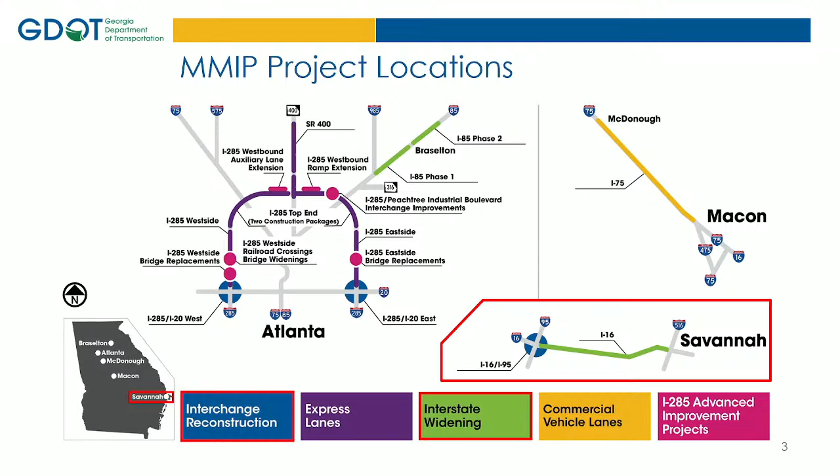So the I-16/I-95 improvement project, looking at this particular diagram here, gives us an idea of where this project is at the interchange, with some directional arrows. It also gives you some project facts associated with the fact that this is a design build project. It's separate from the normal project delivery that GDOT has.

One interesting fact: we're not doing any type of coordination directly with the district. District 5 in Jesup has nothing to do with the oversight of this project. This project is exclusively being handled by our Atlanta Office of Innovative Delivery out of our P3 division. Project length is 7.1 miles, and project length along I-95 is 2.4 miles.

So the widening itself between I-516 and I-95 along I-16 is somewhere in that 7.1 miles. It's probably a little less than that since we're on both sides, to the west of I-95 and to the east of I-516. Additional lane miles being added: 19 miles.

New or rehab bridges: we've got 13 bridges, and John will discuss those bridges as far as breakdowns—the ones that are new bridges, the ones that are being replaced, and what the rehab work is along some of those bridges as well.

Project cost is a little over $260 million. Design notice to proceed was October of 2018, with our substantial completion date looking at Q3 of 2022.

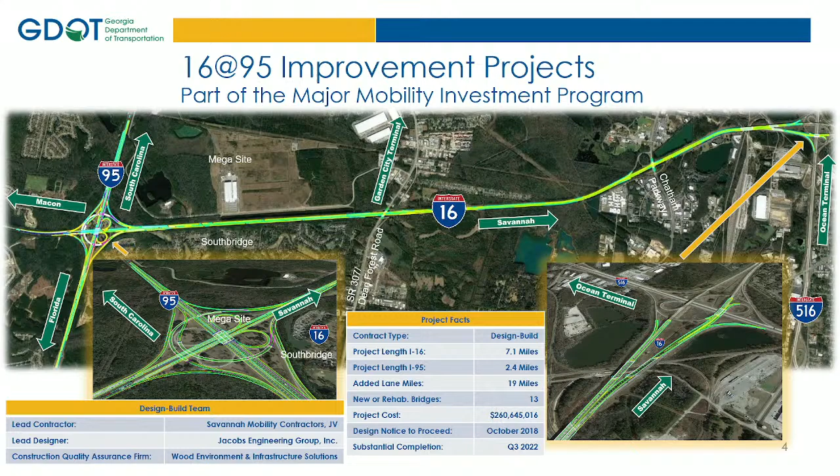The actual lead contractor that we have contracted with is SMC, Savannah Mobility Contractors, with their lead designer being Jacobs Engineering Group, and the quality assurance firm is Wood. It's just interesting to note that this is not a typical delivery model that GDOT has each and every day—it is a design build.

A few of the benefits for the I-16/I-95 improvement, looking at the different areas where we're trying to make improvements: the project includes reconstruction of the actual interchange that we discussed, increased safety and operational efficiency for passenger and heavy freight vehicles. The I-16 widening will modify the existing median-divided 4-lane corridor along I-16 between I-95 and I-516.

Some of the interesting parts of this project also include building a 2-lane emergency use median crossover along I-16 that'll be placed in the median between Dean Forest Road and I-95. And then we'll have a collector distributor lane along I-95 for the northbound traffic that is moving along the loop ramps, which will remain in place to the east.

The existing loop ramps to the west of the interchange are being done away with as part of the partial turbine design.

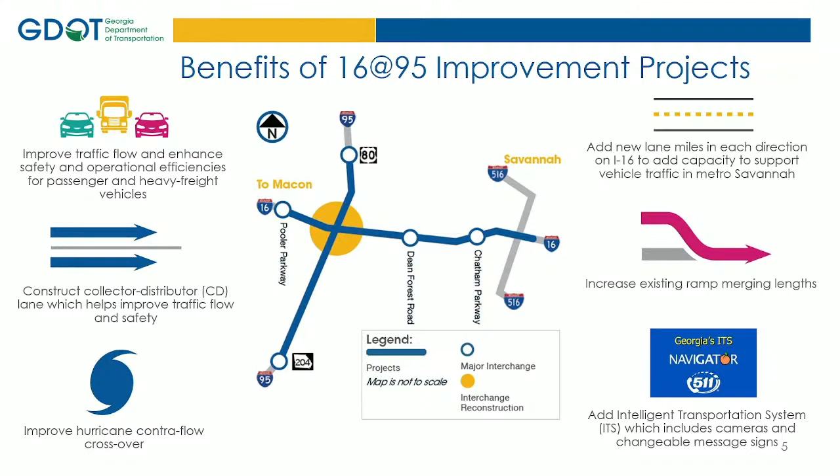So as far as some of the deeper dive into the actual project, I'd like to ask John Martell if he'd come up and we'll do our tag-off. I'll be Stone Cold Steve Austin, and you can be the Undertaker, whatever.

All right, thanks Ron. Good afternoon, everybody. It's great to see you all. Hope you didn't have too many cookies to make you fall asleep now. But I'm going to go over some more technical aspects, show you some really cool pictures, kind of give you a visualization of what we're doing now and what it's going to look like when we're done.

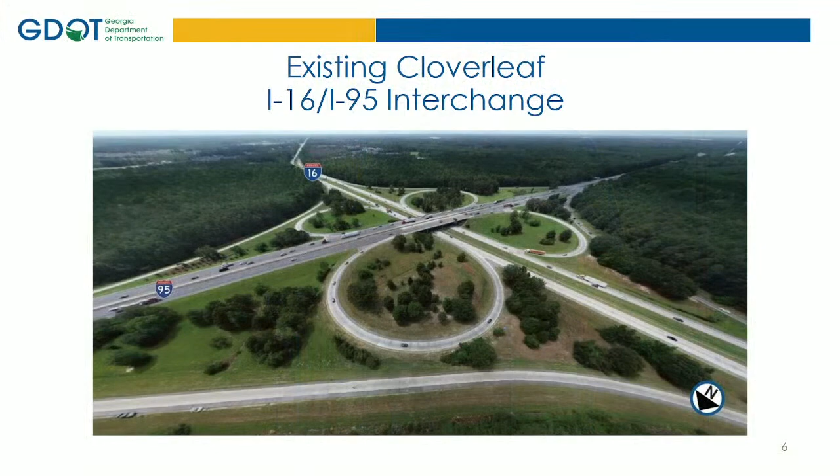So this is the original I-16/I-95 interchange, built in the 1967 to '71 timeframe. As you all know, it's woefully under capacity at this time. That's what brought us today to our project.

This project is the very first in the state of Georgia to have a partial turbine interchange system. It's pretty unique because of the rotary design layout. We're actually building these bridges now.

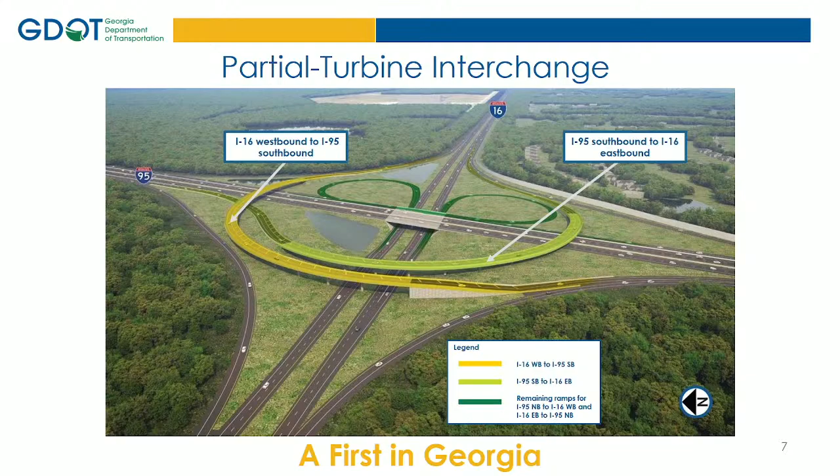The light yellow represents I-16 westbound to I-95 southbound, and the green represents the movement of I-95 southbound to I-16 eastbound. These are really heavy traffic and truck volumes through here because of the Port of Savannah, an unbelievable amount of traffic on the intercoastal with the I-95 corridor.

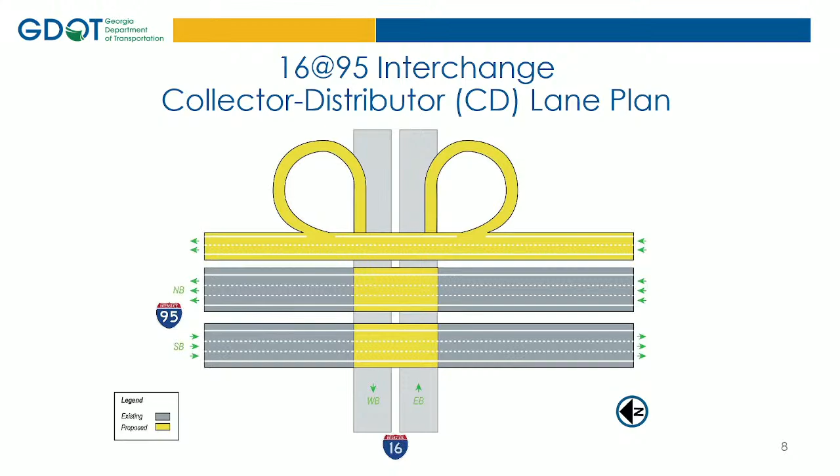The problem now is that with this cloverleaf interchange, we sometimes have accidents up on top of the bridge deck because of that really short weave at the top. So one way to fix that is we're going to put in the CD lane that Ron touched on. It's going to take away all those conflict movements, the delays, the slowing down and speeding up to try to merge into traffic, getting that off the general purpose lanes. I think this is going to help tremendously.

We always talk about the interchange at I-95, but what people don't realize is that we're really doing some major improvements into the city of Savannah from the I-95 corridor. We're going to widen I-16 to 6 lanes in the median of I-16. This work is currently underway.

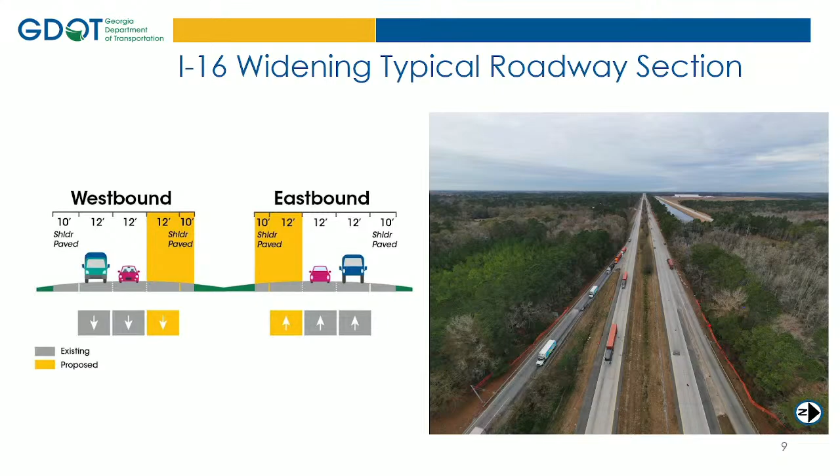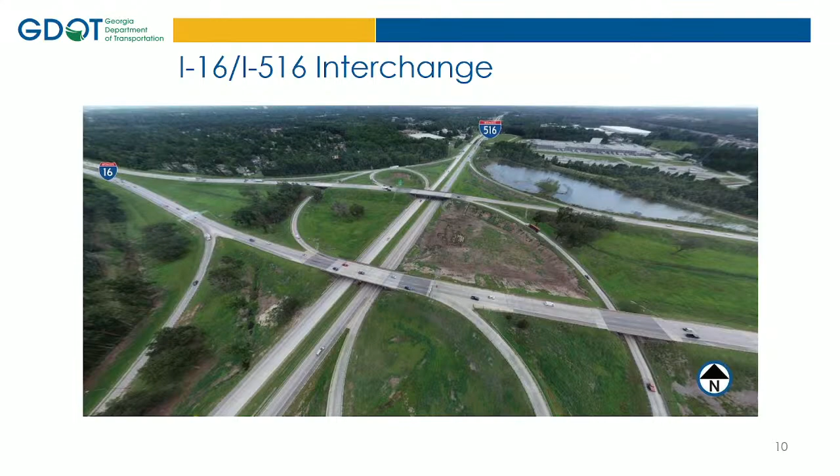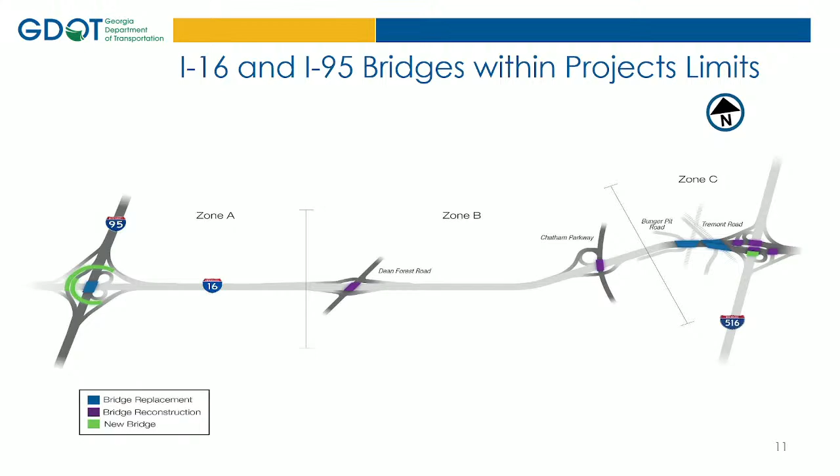We've broken the project into 3 zones. Zone A goes from about Dean Forest Road to the west. Zone B is between Dean Forest and Chatham Parkway. And Zone C is what we're referring to mostly as the I-16, 516 interchange area.

In Zone A, we have 2 brand new bridges, the turbine bridges, handling the movements I just described. The third bridge is an existing bridge, but we're reconstructing it in its entirety, making it wider and somewhat longer. That's the CD bridge, and we're also replacing the GP lanes on top of where I-95 goes over I-16.

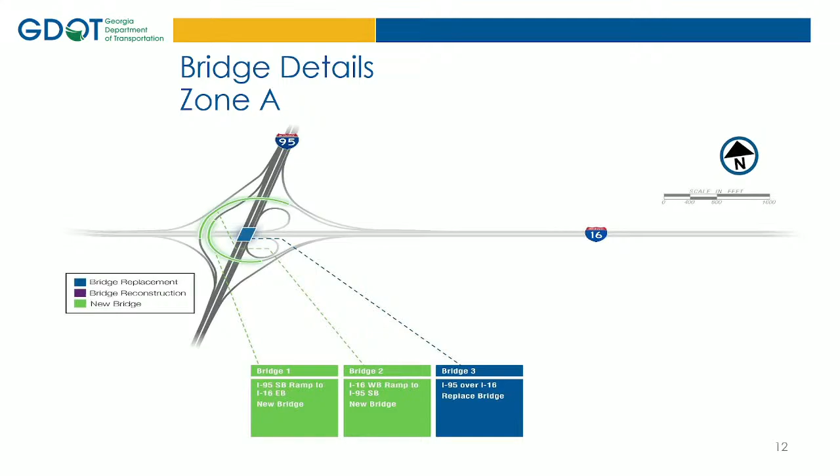As that continues, we also have a lot of substructure work in progress on Bridge 1 and Bridge 2. These are typically 2-column bents. We have 5 piles for each column or bent, as we call them. Those are 24-inch by 24-inch pre-stressed concrete piles, ranging anywhere from about 60 up to 85 feet in length.

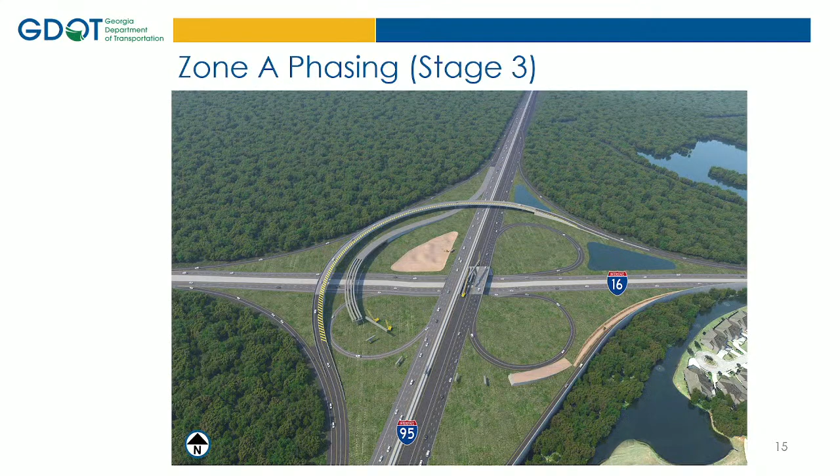As we continue and progress, you can see how the project's going to come to fruition. This is a final concept of what the project will look like in the end.

Going into Zone B, we have Dean Forest, which, after our contract was awarded, the department let another contract within our contract. That's created some challenges for us, but it's going really well so far. Really, lessons learned, emphasis on communication, getting these contractors to communicate with one another. Ron's actually managing this project.

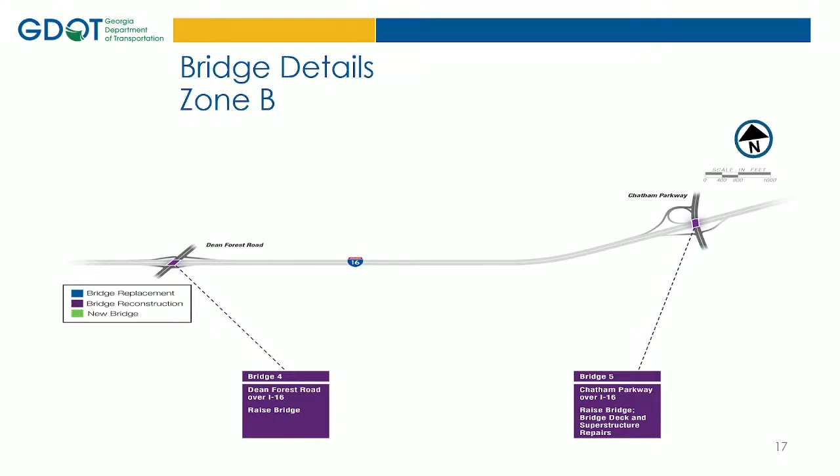We're also going to raise Chatham Parkway, which has a substandard clearance. It's been hit several times because it was built in the 70s. So we're going to elevate that by 6 to 8 inches in height.

The current Dean Forest project is going to be a new DDI, Diverging Diamond Interchange. It's being built by Reeves Construction, about a $34 million project. They are currently putting in soil nails and going to build half of that bridge beside the existing Dean Forest bridge. That's currently going on right now as we talk.

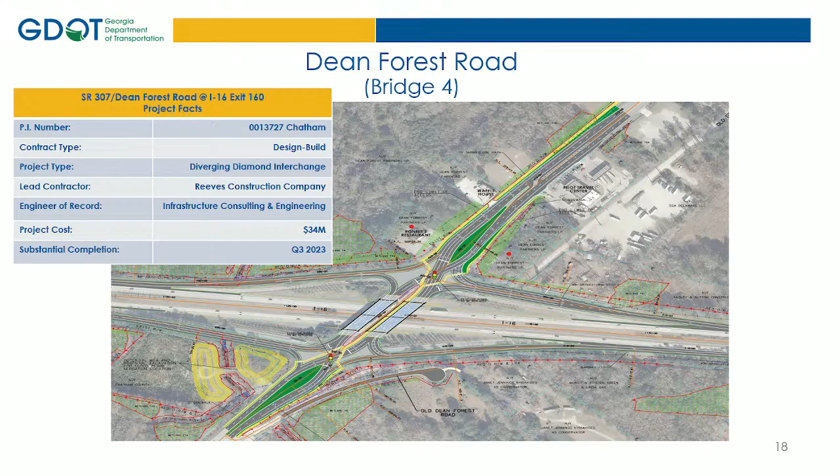As we go into Zone C, you can see we have quite a bit more bridge work going on at the far east end. We have Bridge 6, 7, and 8, which are really challenging structures, not from the complexity of the bridges, but because they're built over active CSX railroads. These railroad lines have, I've heard, up to 21 trains a day. So we have a full-time flagger on the job for this 18-month contract.

I don't know if that'll be enough, but we're hoping our plan is that it will be. The problem is that we have the main spans over the active tracks and cannot work anywhere near the tracks within certain reasonable amounts—can't work over the top of it or even adjacent to it when we have an active train going through or even parked on the tracks.

We're working really closely with CSX and STV, who's their structural consultant, and we have a really good working rapport with them. We have Scott Bridge, who's the subcontractor to SMC, our prime, and they have experience working with CSX. So we have some relationships there we're trying to leverage, and that's really helping with the communication and the planning.

They're really going to need a plan A and plan B every day because of homeland security issues. We really don't know what the time schedule is of the trains until the day before. So as you can imagine, it's pretty challenging.

We're working through it. Bridges 9, 10, 11, and 12 are repairs and refurbishing — redecking, redoing some of the joints, cleaning them up, bringing them up to code, making them modern. Bridge 13 is the only one that's really new, well, 6, 7, and 8 are brand new too, but 11 is an existing bridge that we're going to widen.

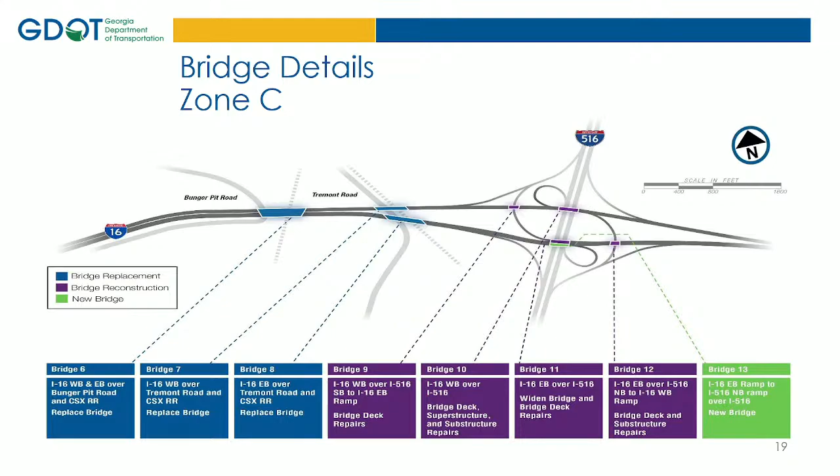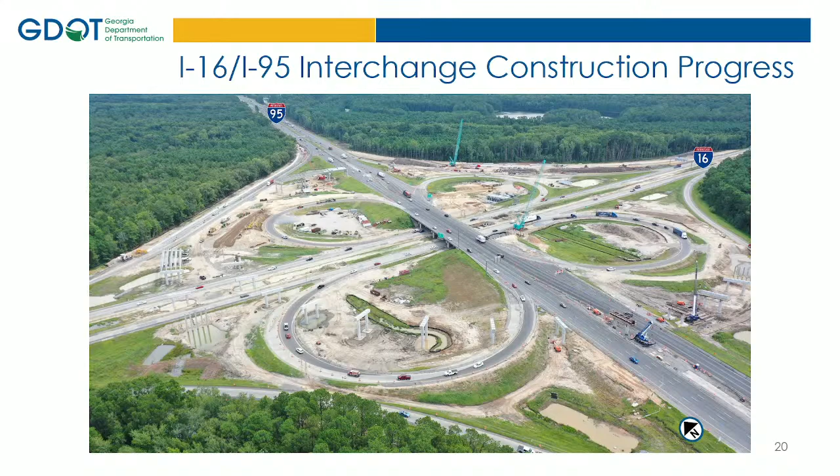Last night we had a really good productive night over the weekend. I think we had two spans set over I-16. We had shut down I-16 completely, which fortunately is really low volume at night. It's not like shutting down I-95, that'd be a whole other animal. But I-16 is very low volume after about 10 o'clock at night, so we're able to detour traffic without too much impact to the traveling public.

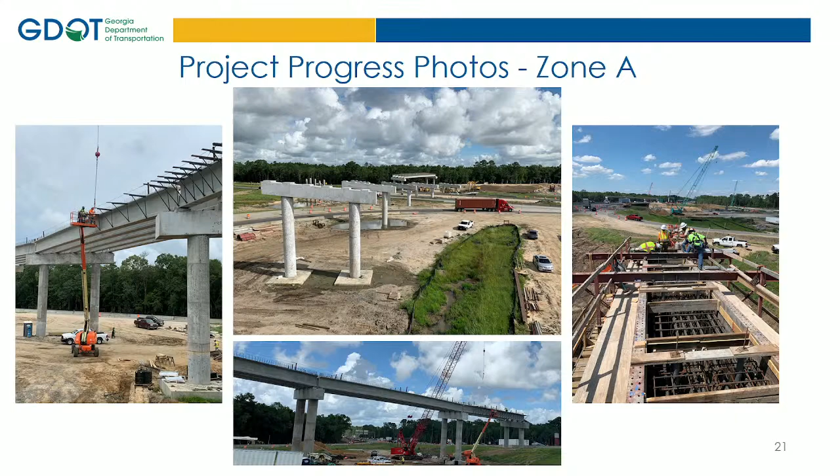Things are really ramping up right now. The contractor's doing a really good job. The only thing that's really hurting us right now is weather. We've had some weather impacts, but all in all they're doing really good. Once we get these beams set, put in the deck pans, get the overhangs in, we can start tying steel. The guys can be high and dry, as we say — they'll be able to work out of the mud and the rain, and I think our production will go way up.

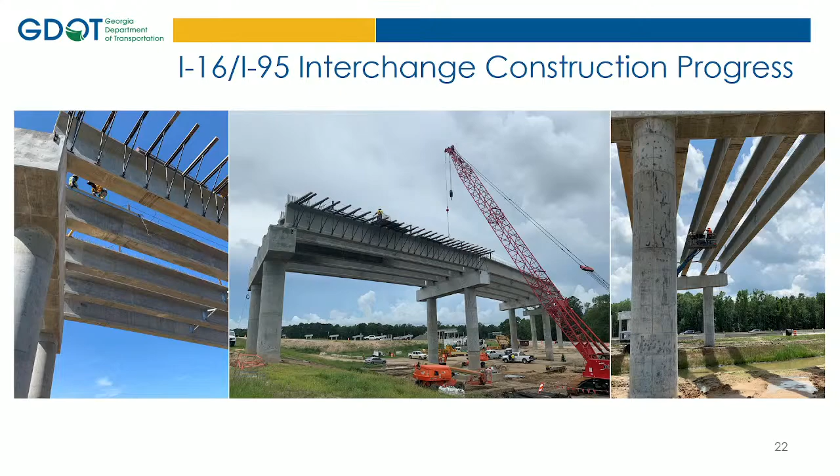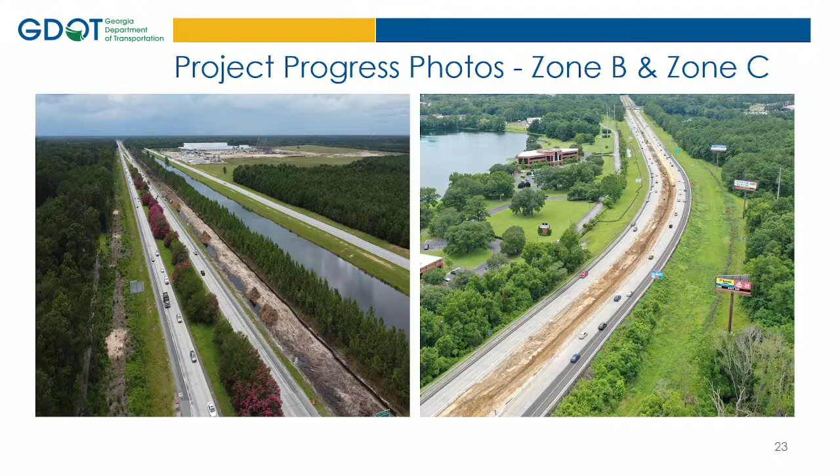Here's some nice aerial views of Zone C and Zone B of the median work that's currently going on as part of the drainage and the widening of I-16 to the median.

One of the things that's really been interesting on this job is it's a coastal project, so the soils are a lot different than they are in Atlanta, as you know. That's why we're using concrete pre-stressed piles. That's something you don't see in the Atlanta metro area, because we have a lot of residual soils, and we have granite and stones.

We have spread footings, drill shafts, and H piles for foundations up there. Down here we need the deep, heavy-duty piling to really get the capacity we need, and it can be as deep as 60 to 80, 85 feet.

Here in the photo on your right, it's kind of an interesting situation — I'll try to talk quick. We had piles being driven that weren't getting the capacity we needed. They were 90% of the way driven into the ground, and they knew they were going to have to splice them. You really don't want to splice pre-stressed concrete piles — you can, and there are details out there, but it's a little risky and it takes time, because with concrete you have to drill and tap, grout, and let it cure. So production and time is everything.

Time is money in design build. So our contractor decided to bring in this Goliath pile puller, and what's really fascinating is it's actually a simple device, just really heavy duty. It's got hydraulic teeth grippers on it, like pliers. It grabs the pile and vibrates it, putting about 90,000 pounds of linear tension on it as it vibrates, and literally it inches out of the ground. It's not quick — maybe an inch every 10 minutes.

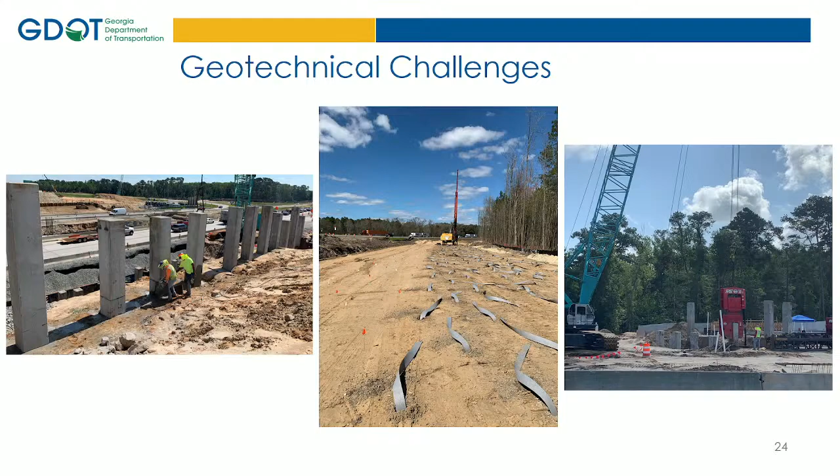So we are overlaying I-16. We're putting a cross slope correction on the existing Portland cement concrete as part of the controlling criteria requirements from FHWA on this project. We didn't want to rebuild I-16 because the pavement is actually still in pretty good shape. So as part of the project, we're going to recondition it. It's going to look brand new when we're done.

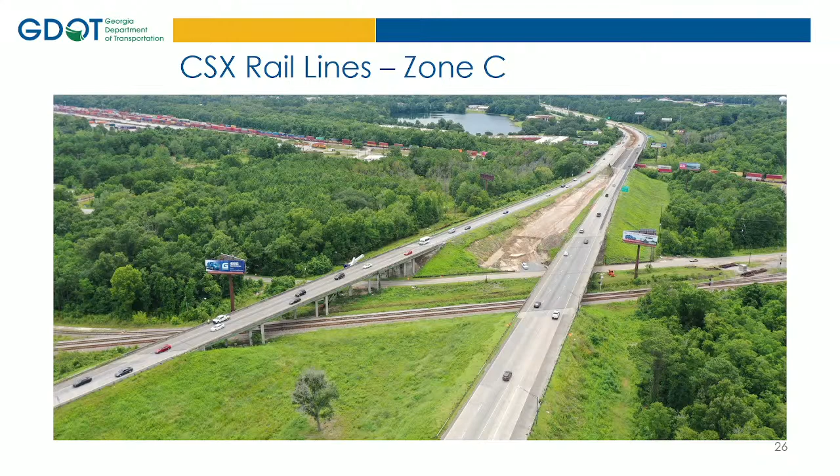And this is just a nice photo here of the bridges I was telling you about, the CSX challenges. With that, I'd like to hand it over to Ron, and Ron can close it out.

So just to look at our timeline, from where we've come from and where we are today: looking at our environmental process, starting back in '16, moving through our public information open house in Q2 of '16, selecting a developer and going through the procurement process, doing a second public information open house in Q2 of '19 as final design continued to move through with our selected developer. At that point it was Savannah Mobility Contracting, and then moving into construction beginning a little over a year ago, Q1 of '20, with final design moving forward and becoming closer to being completed, and then we're anticipating opening to traffic Q3 of 2022. So that's where we are with our current timeline.

And this is a way to try to get involved a little more with our contacts directly to our project. So these are just the different ways to stay in touch with how this project is going to move forward, with updates regarding our project website, our project email address, project hotline - if you dare call - and then also our project social media, how you can stay in contact there.

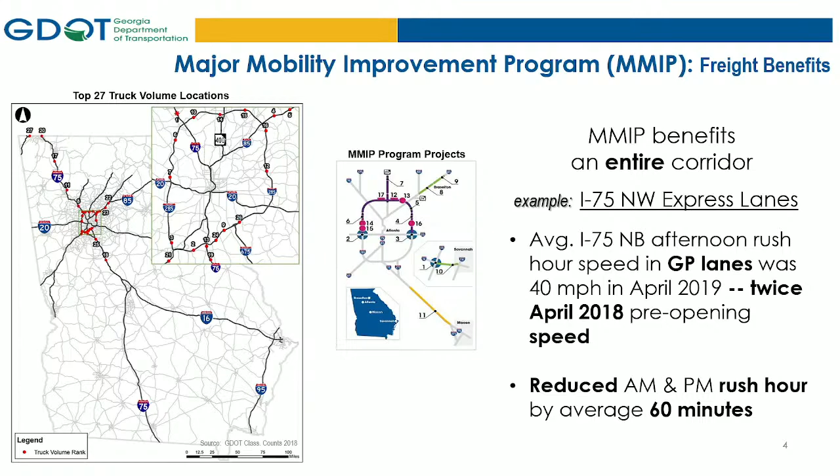So yeah, we do, and it's actually in our top 27 because it picks up that Atlanta to Nashville route. So there's a lot going on. If you're curious and want to see the top 50, I went ahead and pulled those in too. Just by looking at this you can already see—if you can't see the ranking numbers, you see 95, 75, not that 16 isn't important, but we're talking raw volume. A lot of these corridors serve Georgia, a lot serve the Southeast, a lot serve everything east of the Mississippi. So they're the big dogs of truck volumes.

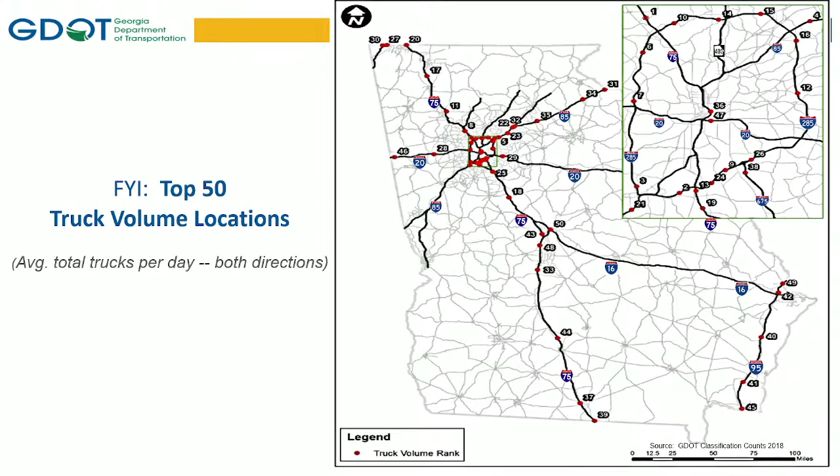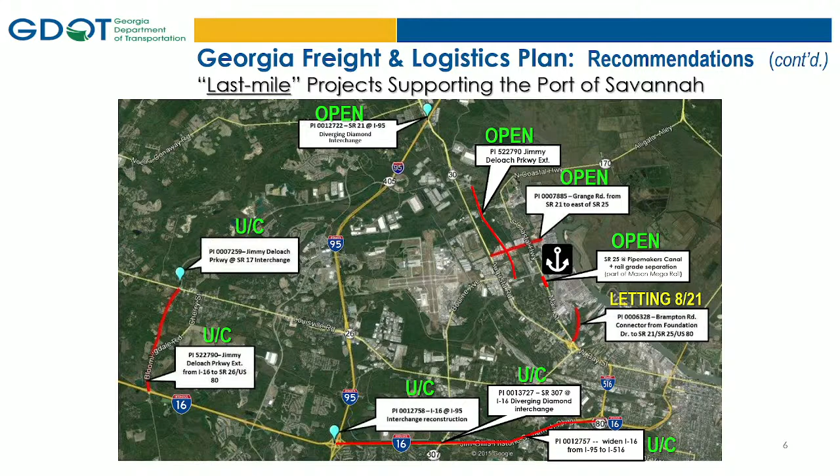I talked about the big projects that we recommended. Well, again, there's a shorter list too of smaller projects that are not really that small. Around the port, when I keep track of these, a lot of these are green—open or under construction—which is good. Again, things that were proposed that are delivered or being delivered. The last one to make it across the finish line from this freight plan will be the Brampton Road project, which will let next month.

So, I've told you we've done a freight plan, we're going to update it, and the next one is slotted to be sent to the FHWA for approval in January. But we've always done things in Georgia that support freight, not specifically labeled freight, but I see state rail plan updates, airport economic impact, because air cargo is a big deal, and we'll talk about that in a minute.

Truck parking is something I'll hit on, but this has always been something in Georgia's bloodstream. Somebody told me years ago this is important to watch in my career, because as people start buying things off the internet, I didn't come up with this idea, but he said every time you use this, you're inviting a truck towards you. The old days, you'd go to the mall to get your stuff - that's how old I am. And now you've got a truck. It might be a semi that comes part of the way, and then the Amazon Sprinter van comes the rest of the way. We are doing this, and we need to know about it.

I won't spend a lot on this, but I think it dovetails really well with our industry panel folks. Georgia DOT has been doing this - not so much when I started 26 years ago, but it's now in our brain to think about it from a business perspective. That's what this is.

The state strategic plan was done earlier this year, and you see the words customer expectations - it's growing in the business. These are things we have to be doing to make sure we continue to be the place. Again, people in South Carolina and North Carolina are great people, but they're ultimately competitors. For me, freight planning is one of the biggest economic development opportunities we have, so we keep ahead of the other states, and businesses decide Georgia's got it going on - we're going to move there, bring our jobs to Georgia, and employ Georgians. That's the passion I bring to this, which is so important.

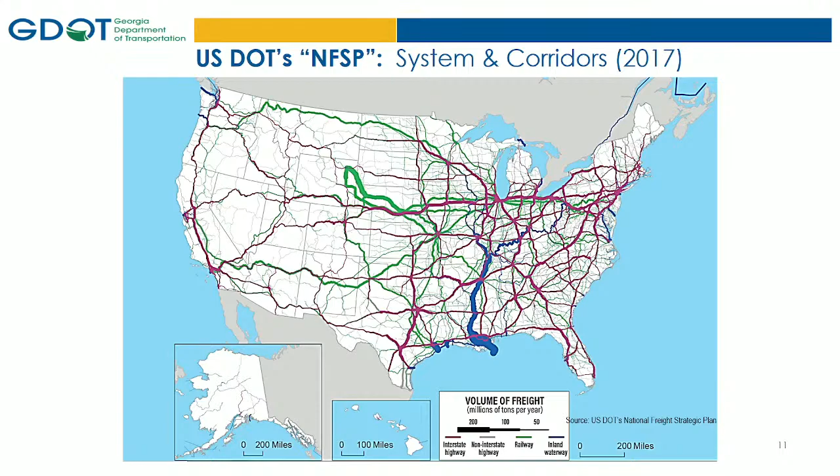These are cargo volumes by mode. Blue is the Mississippi River, so a lot of barges. Red are the interstates where the trucks are moving. Green is the rail volumes. Anybody know what's going on in Wyoming? Coal. This map is from 2017 - it's old. We expect that green line to dissipate and get smaller. The railroads know this, they've known it for a while. As coal comes out of favor to generate electricity and gas turbines come in - natural gas, solar, or wind - there's going to be excess capacity to move freight on the rail lines.

If you want to see Georgia a little higher res, you can see it again. I told you earlier that I-75 picks up a lot of volume. If we were a country and Florida was a country, Florida would be our number one trading partner. That's why I-75 - folks have driven it and said, yep, lots of trucks on 75, and that's why. As people continue to move to Florida, they need food, they need materials to build houses. You're just going to see more of that north-south movement as Florida basically consumes things - a lot of things that we make here in Georgia, which is not a bad deal.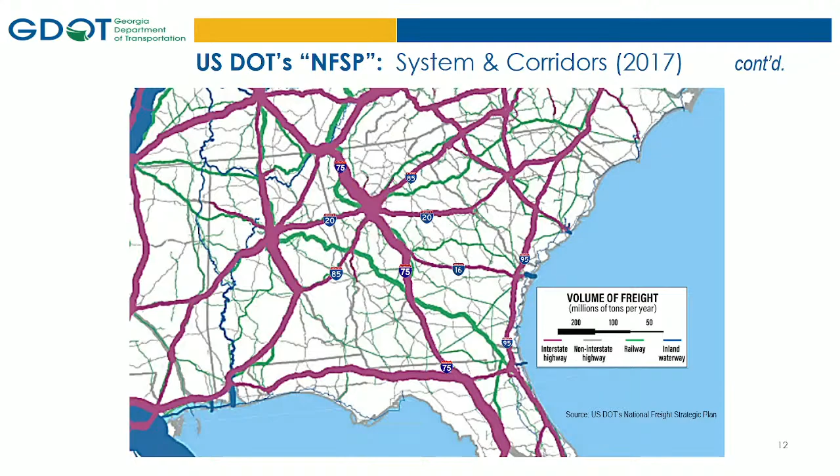This is what it looks like now in Georgia in terms of how things move and by what mode. And this map, I changed the colors just to trade it up. So orange is the predominant mode - it's trucking. Not that rail's not important.

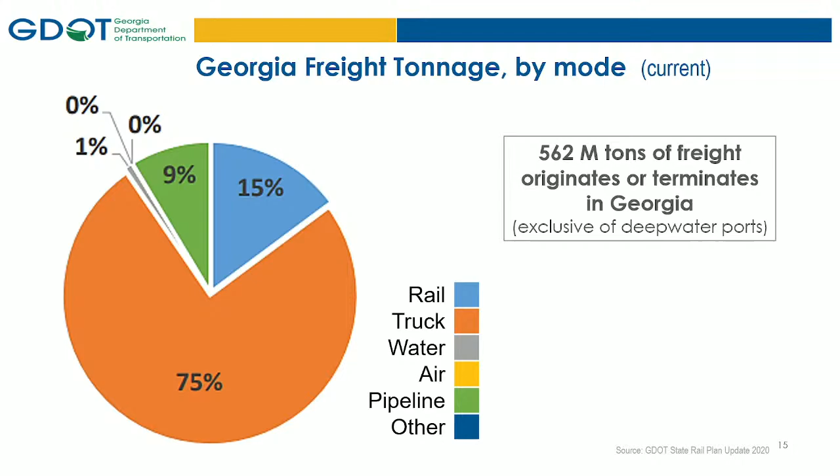Everybody here, not that everybody's from Atlanta, but who is kind of Metro Atlanta-ish? A lot of them. Even if you're not, you've been to Atlanta and you've seen what I consider the holy trinity, the top 3 inland distribution markets.

So why are there so many trucks in Atlanta? Dallas, Chicago, and Atlanta kind of stock the store in the hinterlands. The lines on the map show how far they go and the width of the tonnage.

You can't see it very well, but I noticed one thing: Dallas is a great place, I have family there, but our red lines in Georgia go all the way to the West Coast. Dallas doesn't permeate very far east into the southeast. So Chicago and Atlanta, coast to coast. Things are flowing everywhere, but in Georgia, Atlanta kind of stocks the store in the southeast and will continue as the population increases.

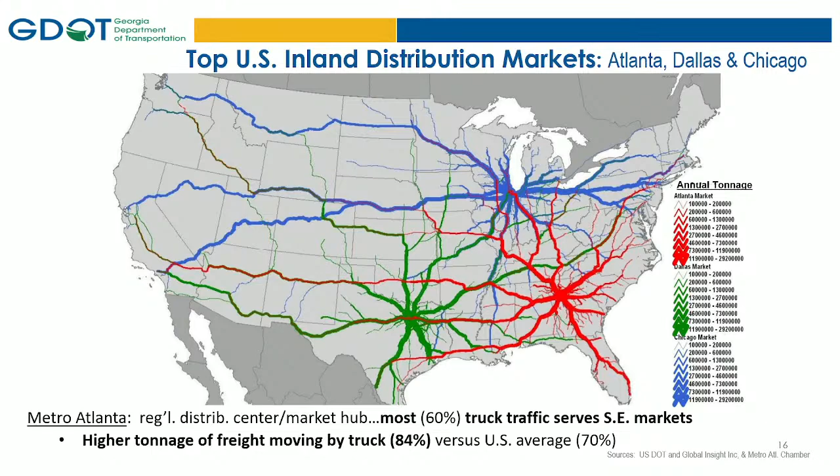There's some numbers at the bottom of the screen if you want - I talked about higher tonnage moving by truck. So there's some numbers if you like the numbers, to figure out how much more we are moving by truck in Atlanta versus the rest of the country.

Won't spend much time on this except these are - every dot is where a job is. So there's not a lot, people think, oh, it's all in Atlanta. I'm going to transition and start moving you away from that. I see a lot of dots not in Metro Atlanta. This is a trend that's starting to happen more and more.

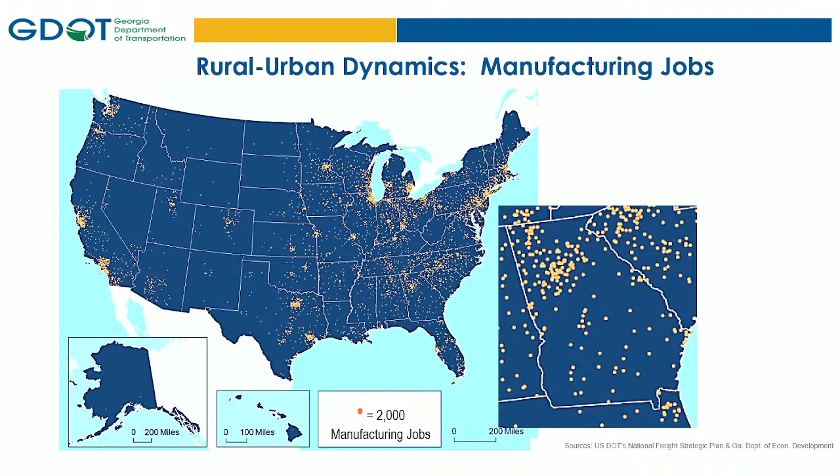I don't know if I saw this, but the governor announced this first quarter of FY 2021, which was about a year ago - a little bit less than a year ago. During COVID, 83% of Georgia's economic development was happening outside Metro Atlanta. When I saw that, I was like, okay, my thesis is correct.

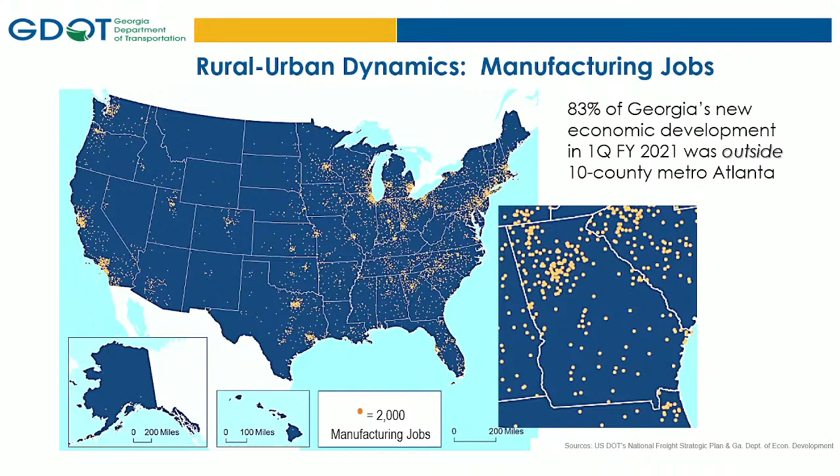A lot going on - automotive manufacturing, we had one of our speakers from Kia. Look at all the dots in Georgia. People say, well, there's no car plants there. Well, there's people who make components and subcomponents and parts. So a lot of it goes into Kia - their parts come from these suppliers.

Some of their parts come, you heard the speaker say, from air cargo. Some of them come by ship. But a lot of these parts companies are also making parts for BMW in Greenville, South Carolina, Mercedes-Benz in Tuscaloosa, Alabama, Volkswagen in Chattanooga. So a supplier might make a part for 3 different cars. And there's a lot of business in Georgia, a lot of jobs.

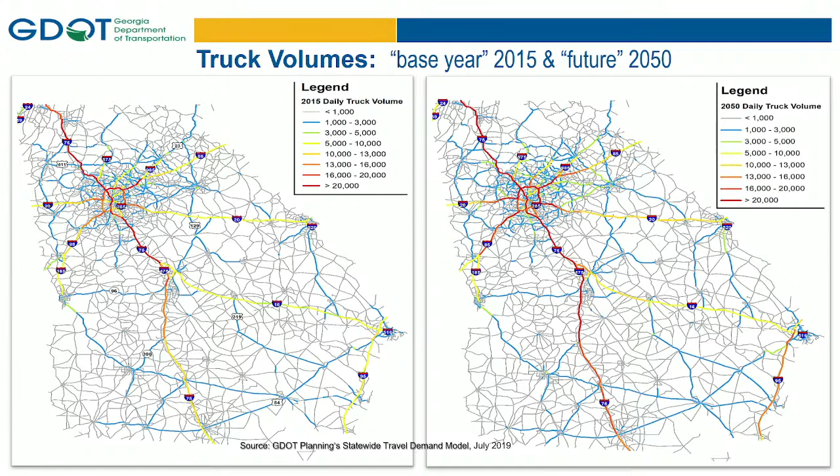I've followed big platoons coming out of the port. I had a meeting in Valdosta, and I didn't want to pass them, I just kind of blended in with them to see where they're going. And they are using this 84 route, which is why I showed you earlier, US 84 is a pretty big freight corridor in South Georgia. People say, well, it's not the volume seen in Atlanta, but it is important to the state.

You probably have heard the port folks talk about Mason Mega Rail. In a nutshell, I won't read this, but Port of Savannah already has the largest on-dock intermodal rail facility. So I told you a lot of stuff's moving by truck, but that doesn't mean things can't change. And we, being the state, can help make shippers be able to make decisions that are best for them. If a truck makes sense for them, they're going to do it.

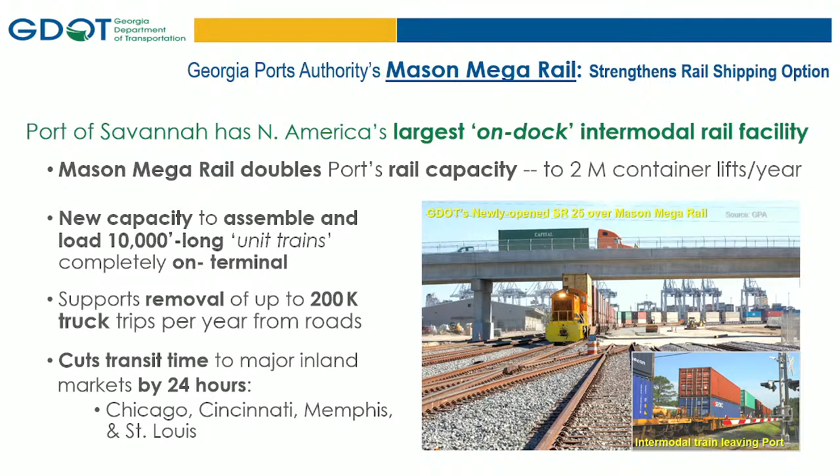But if we can do anything to make it more attractive to use rail, the state's doing it, in this case the Port Authority. GDOT was a partner on the overpass at the bottom, which was the picture at the bottom in the previous slide, but they are pretty close to being done and putting track in. They think right now 20% of the stuff that comes out of the port leaves by train, and they expect by 2030 that number would go to 30%. You think, well, that's only 10%, but that's a 50% increase. Will it solve all the problems and suck all the trucks off the road? No.

Because same reason you all drove down here instead of taking a flight, even though there's a flight out of Hartsfield to Brunswick, it just made more sense. If you've got kids, you're gonna drive. So shippers make that decision too, rail or truck, rail or truck, and they're gonna make that decision. I can't make it for them, but we're gonna make it so that if truck makes sense or rail makes sense for some shippers, they've got that option. They know Georgia's a great place to come and do their business.

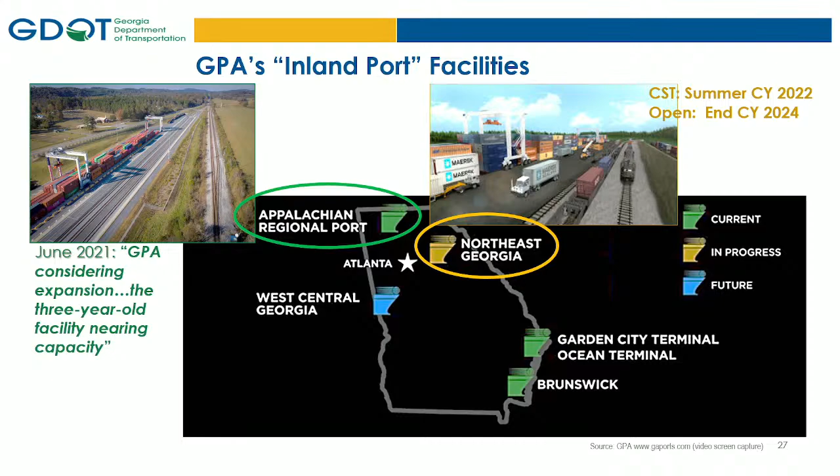The one in West Central Georgia is still being talked about, but that would be to serve Kia. The first one folks have heard about is down in Cordele. That one isn't their baby—they have a marketing agreement with them, but they didn't design or operate it. But the Cordele Intermodal Services is still there in Southwest Georgia.

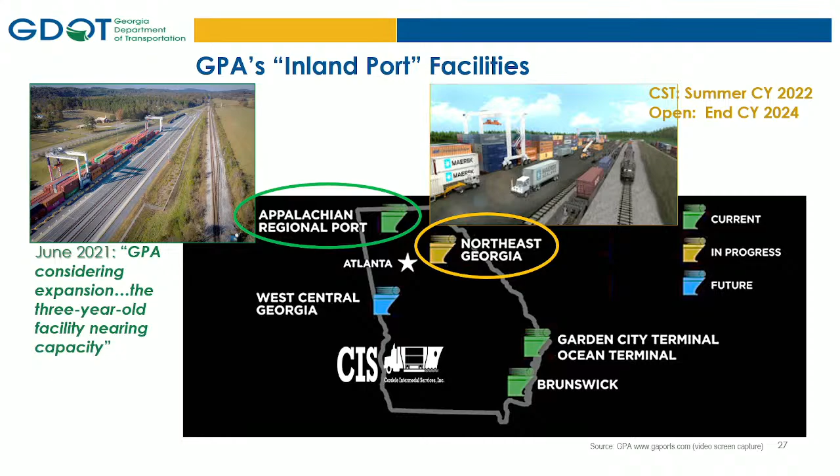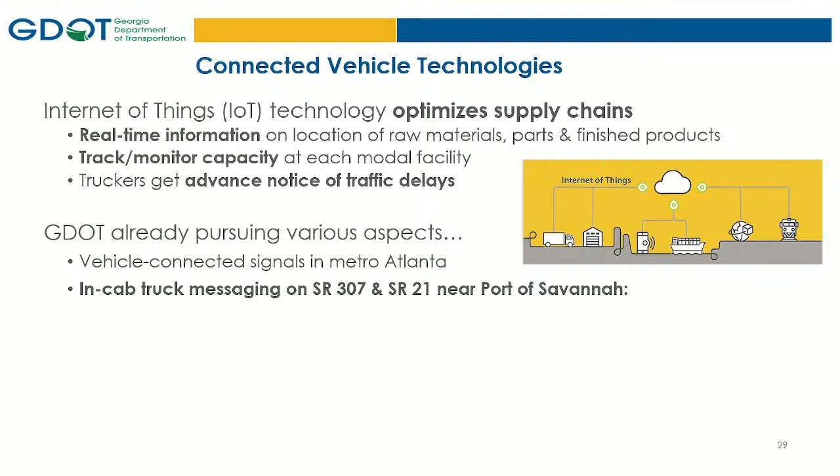Might take a little longer, but it sure beats being stuck at the tracks, because the biggest thing I hear from the private sector is they don't talk about congestion in Atlanta—they say you're not gonna fix congestion in Atlanta, you're not gonna fix it in Miami. This is the way it's always been. What we can't deal with is unreliable trips. If you fly, you figure you should get there an hour and a half early. You don't want to, but you build it in. Truckers and shippers do the same thing—they don't like unreliable surprises. This is an example: if you can give them some options, they can keep moving.

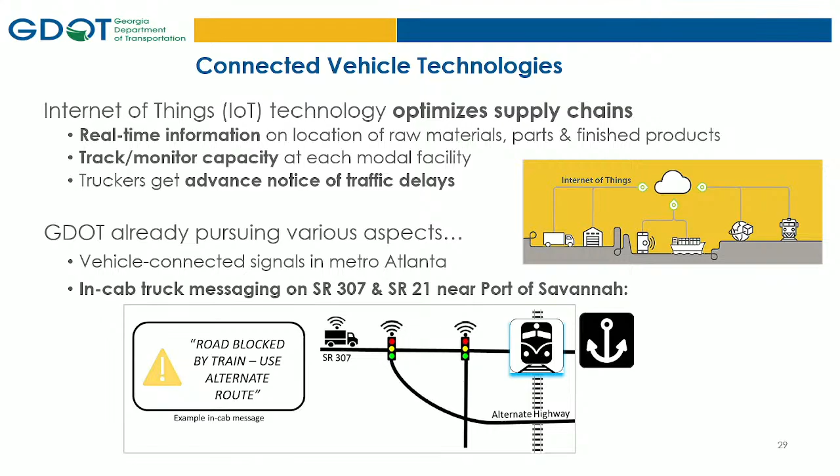Another thing that's fun—I remember as a kid, the giant sucking sound. That was Ross Perot talking about NAFTA. NAFTA got replaced and went into effect July 1st: the USMCA.

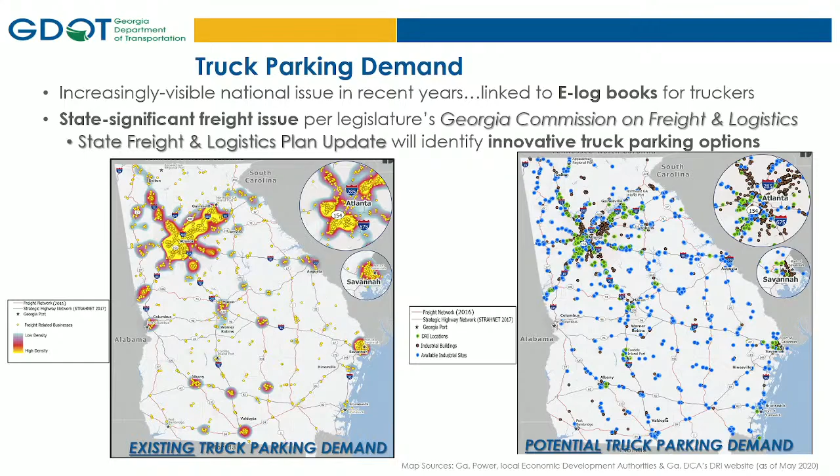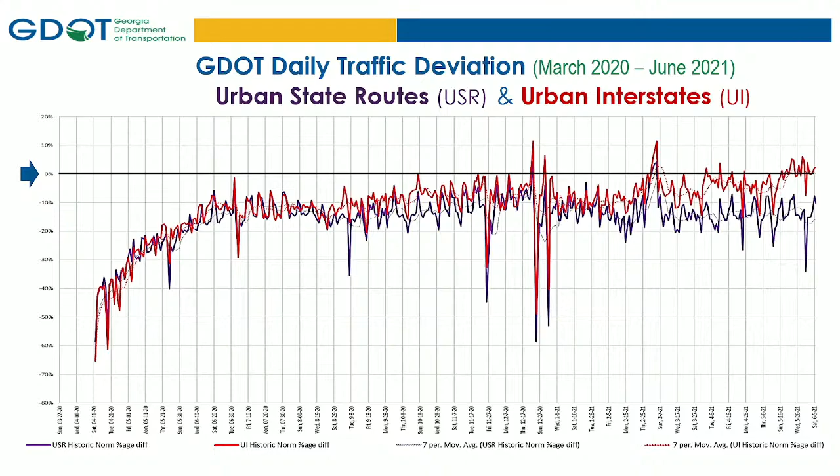Again, why? I think I'm the only person on the planet that has not bought groceries online - that's the one thing I refuse to do, I still haven't done that. But again, is this the new normal? We're still watching. Again, people go back to brick and mortar - will this shift? I don't know.

Some states never zoomed up like this - they went down and stayed down. Michigan, auto manufacturing, their truck volumes were just flat or below. They didn't bounce back. Ours bounced back. So that was on interstates.

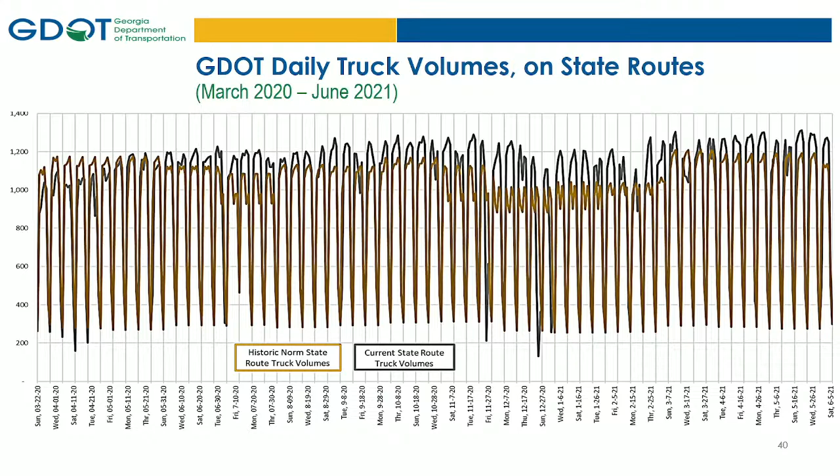This is on state routes. If the contrast didn't come out too good, but the same thing - more trucks, you see them, you sense them, they're there.

Here's something I ran across in that impressive academic journal called USA Today - I don't know if you guys have seen it. This was in the USA Today, July 1st. I said, USA Today, nobody else picked up on it.

Basically saying the peak hour spreading in the morning is changing nationally. Two things I took from this: number one, they used WeJo as the data source. Has anybody heard of WeJo? It's a new data platform. Again, I don't own stock in them - maybe I should have. 20 years ago, we didn't have these good data sets. Now the market vendors are coming out of the corners with this data from connected vehicles.

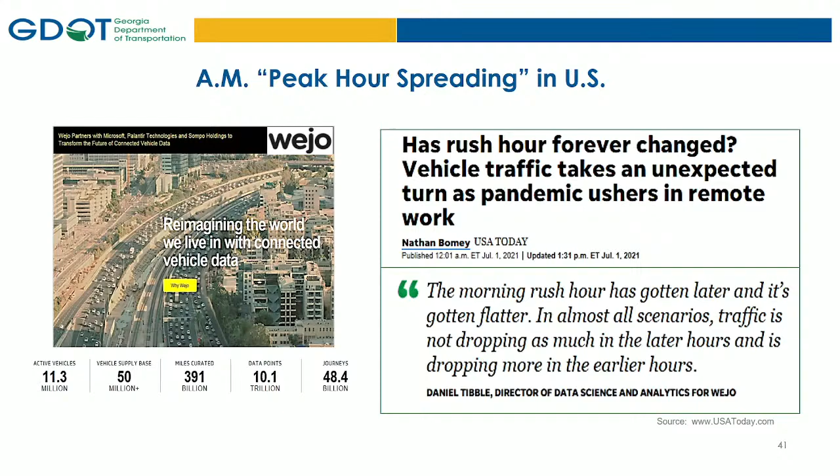So USA Today, if you find that article, got Wejo to crunch the numbers and found this trend. I thought, I can do that too. So I pulled up TomTom, and I think I did this on a Friday at 5 p.m., to see, hey, are we getting a little bit of an AM bump. I think we are.

You can't see it very well, but the red has shifted a little bit to the right, showing the morning peak is starting later. It's building later, it's starting later, and it's ending a lot longer - well, not a lot longer, but it's going longer.

So again, Mr. Truck Guy, people think, who cares? Well, I bet UPS cares. There's that big UPS distribution center where all the delivery vans come out on 85 in Pleasantdale in the morning. So they're trying to get on 85 heading into town, and rush hour has not abated. Ouch - so that's something I'm sure they're dealing with. I didn't expect our speaker to talk about it, but I'm just thinking, if you're a truck driver and it's 9 o'clock in Atlanta, where are all these cars coming from? Usually it died down. It's not.

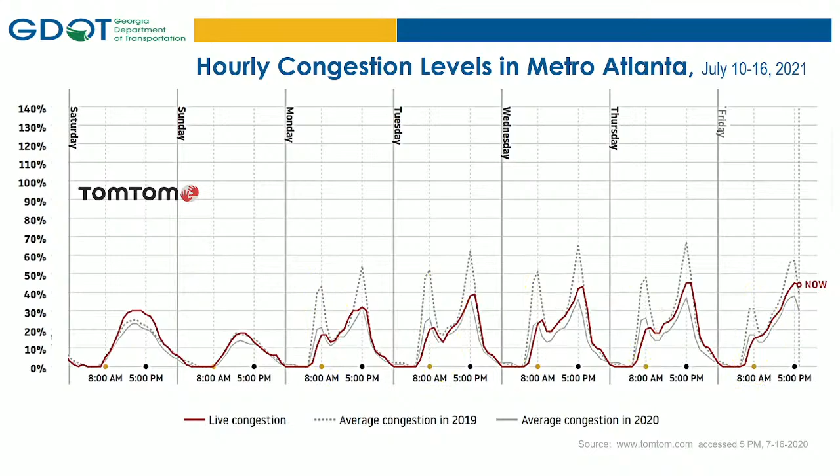No, till June 30th. Anyway, I will take questions later, and thank you for your time. Thank you, Tom. Geez, that was a lot of information. Okay, let's see.

I just asked him to share his screen. Okay. Tom, can you hear us? Yes, I can. Okay. And can you see my screen? There you go, okay, you're up and running. Okay, let's get back to the beginning. All right, well, thank you.

Yeah, I just want to share what's going on here at the airport. Just real quick, some quick review. Calendar year 2019, we handled over 110 million passengers, busiest airport in the world. Had just over 904,000 takeoffs and landings that year as well. Then, of course, the pandemic hit. We learned very quickly that an airport is nothing without passengers. Fortunately, we're watching now, the summer's been amazing as far as the recovery of the leisure traveler. We're still waiting for the business travelers to come back, and especially the international side of things. But yesterday we had 89,000 passengers go through the TSA security checkpoints. It's just really amazing. But things are bouncing back, and so one thing that we always are focused on is trying to maintain a good level of service for the passengers as well as for the employees here at the airport. So we've always got a lot of capital work going on.

In 2016, we signed a new lease with most of the airlines here. I won't go into all that, but part of that lease is a capital improvement program, and in that lease, the value of the program was about $6 billion. We've been evaluating it over the last couple of years. It's going to increase a little bit, and so we're just getting started on this program now.

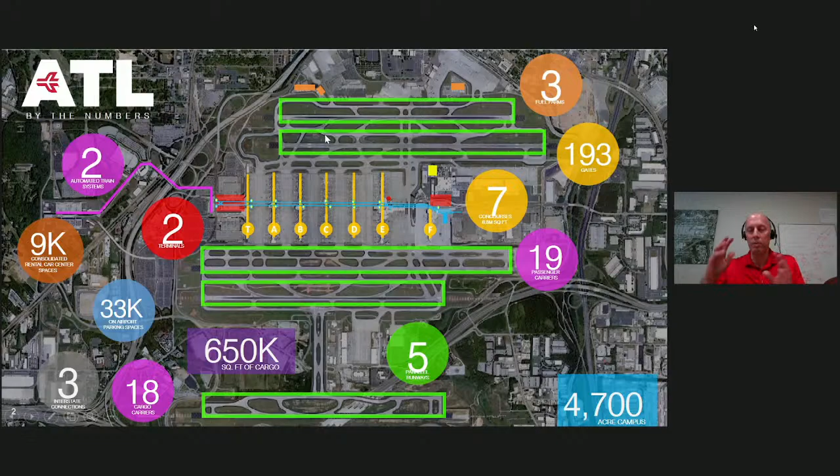We've got a south de-icing facility going on down here, a huge ramp to handle up to 10 aircraft with a support facility. And we're rebuilding ramp 19 up at the top, a large ramp area in front of one of the Delta hangars.

So, the Concourse T North extension. This is going to be a 5-gate extension, up here at the very end. You can see 4 airplanes shown here, plus this empty gate where the 5 gates will go. This is a rendering of what the extension will look like, with a lot more volume than the existing concourses other than Concourse F, which is the most recent addition.

It's designed to handle Group 3 aircraft, so that's your A321, 737 family of aircraft. And actually, United Airlines will be moving into the T North extension.

What's interesting about this photo, taken just a couple weeks ago, is you can see this is the T North extension proper. The gates, as we saw in the previous rendering, wrap around here. We had to relocate the Terminal North exit roadway, which used to follow an alignment that went right through here, so we had to shove it over here.

As you know, any construction we do now, there's no more greenfield site construction. If we want to build something new, we've got to tear something down. So we had to get rid of a good portion of the North Economy lot up here, and relocate the North Parking Deck exit plaza, which is back over here now. We had to create a lot of construction footprint - that's just part of how we have to do things here.

This project will open in December of next year. It's about $340 million. One thing we do here is use pretty much every project delivery method - we've got good criteria for when we use certain delivery methods, but this one is a construction manager at risk, a CMAR.

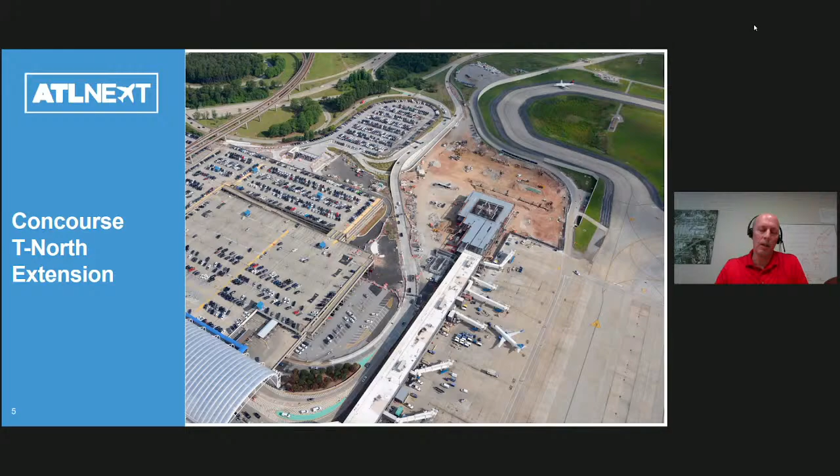The next one is the plane train switch replacement. We have to replace all 13 switches - these are original, so they're 40 years old, and they've been repaired and welded upon, welds on welds, so we've said we've got to replace them. The plane train has a very narrow maintenance window, only 4 hours a night, but on some nights we have to have up to a 10-hour work window.

Which means we have to do some tricky things with the plane train while still moving passengers. On certain Tuesday nights we have an extended closure, and the plane train has to go into what we call shuttle mode - it's just the only way we can get the work done. We had a special crane built to bring in this big white piece. I'm not a rail expert, but the replacement has gone very well.

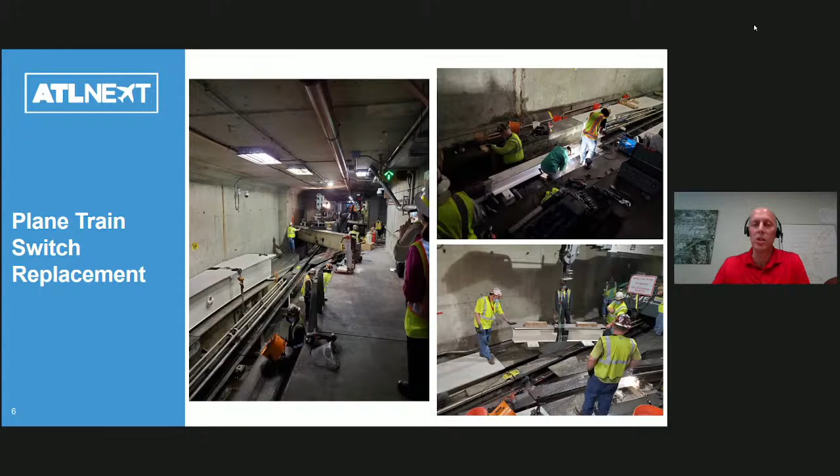This one is a sole source - we're going with Alstom, formerly Bombardier. They operate and maintain the plane train for us, so they're leading the effort on this. To replace these 13 switches, we're looking at about $60 million.

Then there's the plane train tunnel west extension. If you look over here in the upper right portion of the sheet, this is the end - this is the west end of the plane train.

You'll note if you're ever in that first car at the bag claim station, you see a wall in front of you - that's the end. What we're doing is tunneling in from the west end going to the east, and we do blasting every night. We've probably done by now 175 blasts underneath the domestic terminal, underneath the MARTA airport station, underneath the SkyTrain airport station. It's about 50 feet down, so there have been no issues.

Even though we monitor everything very closely, seismically. We have a massive groundwater dewatering operation. It's been quite a challenge thus far - we face anything from pure rock to mixed face, and make about 5 feet of progress each night.

The point is to relocate the existing turnback over in this area. By relocating the turnback, we're able to decrease headways from 108 seconds to 90 seconds, and increase the number of passengers per direction per hour from 10,000 to about 12,000. That project will be finished in October 2023.

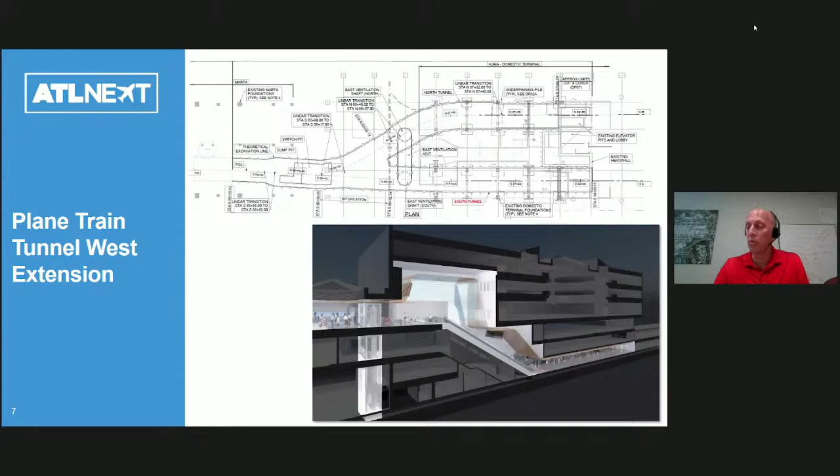This one was different - this is our first progressive design build. If you're not familiar with that, that's basically a CMAR with design responsibilities. We didn't want to have anything to do with tunneling ourselves; we do a lot of construction, but we've never done tunneling. So we decided to go with a progressive design build. It's worked out real well.

Here's an interesting photo of the tunnel. I've been down there a couple times. As you can see, it's quite a mess, but it's tunneling. Still have a ways to go, but it's a very mucky, messy environment down there. It's going really well though.

After we get down to the east end, you see the gentleman walking on the current ground there. We have to still take out another 5 feet, so that's going to go down another 5 feet more.

The Plane Train tunnel west extension - when you factor in the tunnel, we've got a lot of terminal work to do. We have to add an escalator and do some other things in the terminal. We're going to buy 14 cars and redo the train control system. That's going to come in just over $300 million.

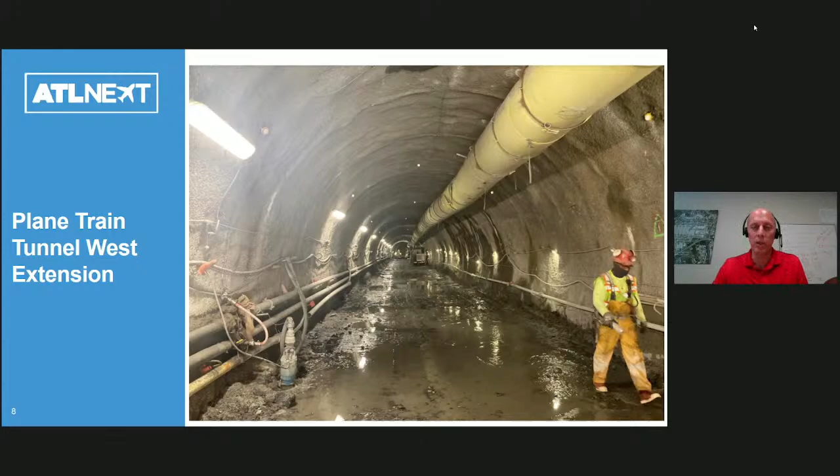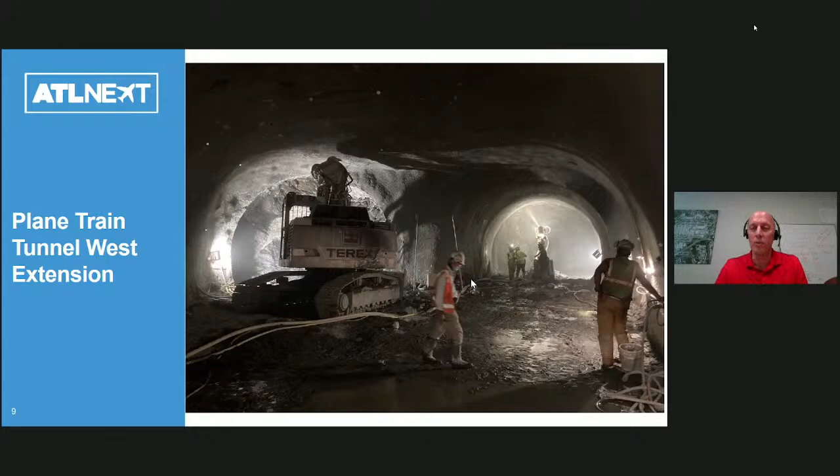There's the bifurcation - you can see there's one tunnel here, this is the southern tunnel, this is the northern tunnel. The train will come through the northern tunnel toward us, and then to turn or switch direction, it goes into the southern tunnel. This project's going really well - we've got a mining operation going on under the domestic terminal, and you wouldn't be aware of it.

Next is the 9 left end-around taxiway. We've got an end-around taxiway up on the north side, that's the 8 right end-around taxiway Victor. This one still doesn't have a formal name yet, but we'll be working with the FAA to give it a name. Essentially, airplanes that land on runway 27 left will exit the runway, and instead of holding short to cross, they will exit and just keep taxiing on around, keep moving. Whereas departures from 27 right just keep departing overhead. It's a wonderful operation - it works great on the north side.

We wanted to replicate that success on the south side. This one just broke ground last week. One of the drawbacks of the project is you can see how the taxiway goes through these parking lots, so we lose a lot of revenue parking, and we're trying to replace it. We've built other parking facilities knowing we're going to lose this revenue parking, but that's just part of the deal - we have to balance passenger desires and airline desires, as well as our ability to generate revenue.

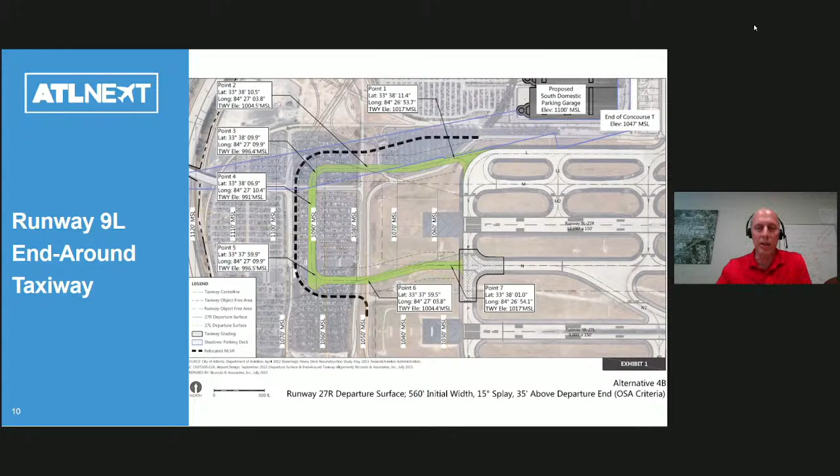This one is a basic design-bid-build. It'll be finished in December of next year, and the construction cost right now is at $56 million.

Coming down to south de-icing - you may wonder, do we really do a lot of de-icing in Atlanta? Well, we haven't in the last 2 years, but like during the Snowmageddon of 2014 and other events, when full-on de-icing is required, it's always such a challenge here, just because the airlines don't do it frequently enough. So we're going to be adding a much larger facility that can de-ice up to 10 airplanes simultaneously.

Of course, if you're not familiar with de-icing, a crew comes around in a number of bucket trucks, and they spray the airplane with a special fluid to break up any snow or ice that's on the airplane.

They use type 1 or type 2 de-icing fluid, and then they'll spray type 4 de-icing fluid, which is a very viscous, thick fluid that will actually adhere to the airplane and prevent snow or ice from forming on it. Once the airplane starts its takeoff roll, that de-icing fluid just shears right off, and you have a nice clean, aerodynamically clean airplane, and it gets airborne, and it's a very safe operation.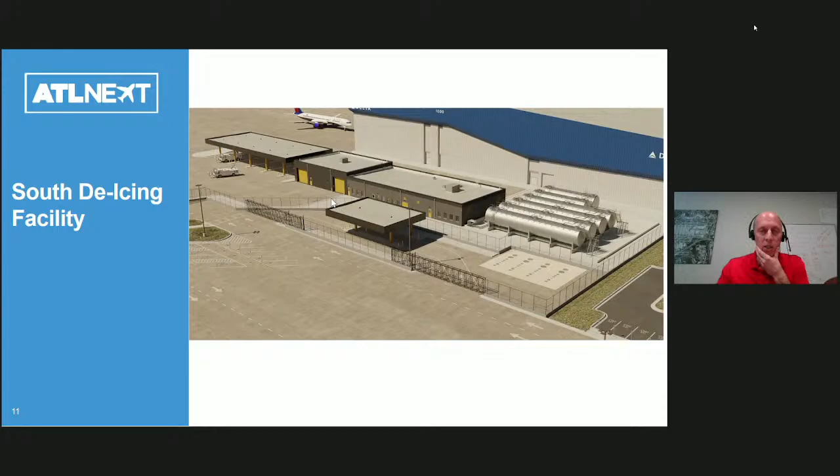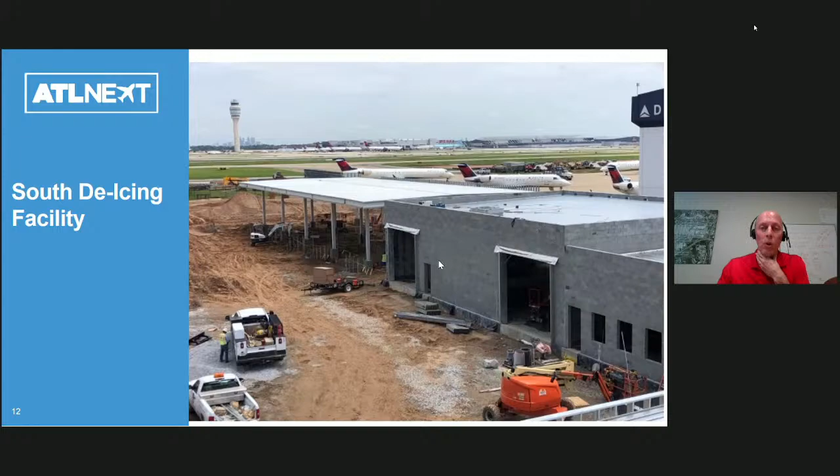South de-icing is a very large project. Not the facilities here - this is about $29 million. The balance of the ramp work, a lot of pavement work, is on the order of $100 million, and that project is ongoing right now. There's a good photo of the actual work from a couple of weeks ago. It's right next door to what we call the Delta Technical Operations Center 4 hangar, where primarily regional jets get work done. And there's a good shot of the glycol tanks, big tanks.

Next project, this is the one up in the northwest corner of the airport - ramp 19 and taxi lane A3 pavement replacement. This is about 100,000 square yards of ramp that has to be replaced. Some of the pavement is so thin, it's from the original terminal when it was located on the north side, so we're ripping all that pavement out and putting back in new pavement.

As you can see, this is how it's being phased. We work very closely with Delta to try to maximize either the number of airplanes they can park while we're doing our work, or maximize the size of airplane that can get to the hangar. There are certain phases where they can still maneuver in - they don't have 777s anymore, but an A350. If someone wanted to bring a 747 back there during certain phases, we can accommodate them. We work really closely with Delta to fine tune the phasing, that's why this thing is so chopped up, so it doesn't readily lend itself to some really long pulls.